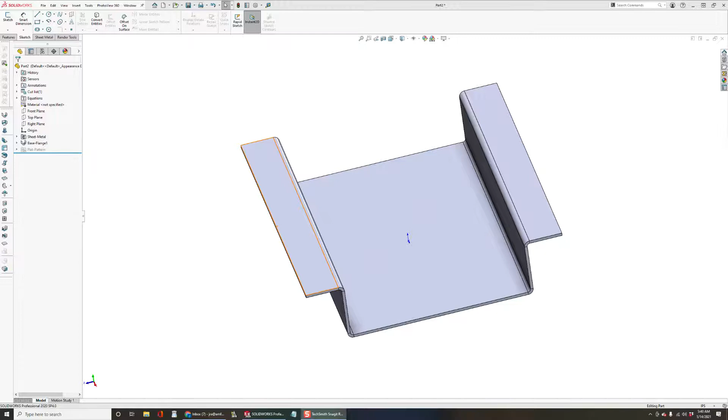So the main use for this feature is if, for example, you have a part here, you have some bends in it, but you want to put a cut that goes through the bend. The easiest way to do that is to unfold the part so it's flat and then extrude those cuts through the bends and then fold it back up. So I'm going to show you how to do that.

It's actually really simple. Over here in the sheet metal toolbar, first of all, this part right here was created using the base flange feature, as you can see over here in my feature manager. So just one feature I used to create that, and now we're going to go in there and I want to add some cuts that go through these bends.

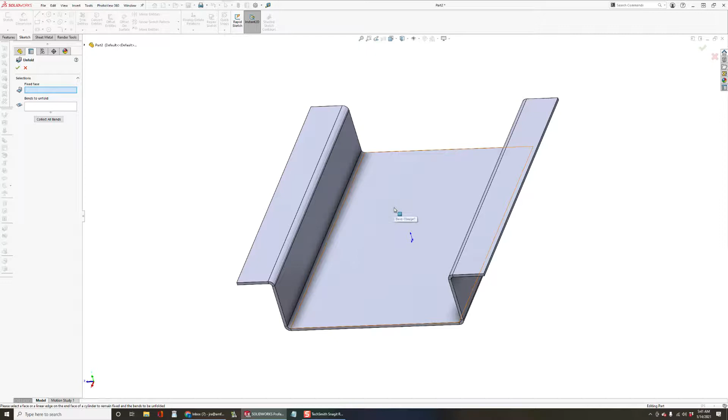So let's go over to our sheet metal toolbar on the left here, and this little icon right there, that's your unfold. So we're going to go ahead and click that. Select a face. So this is basically the face that's going to remain stationary as everything else folds flat.

And then the easiest thing to do is if you want to go ahead and just flatten everything out, you can always do that. If you just want to flatten out a particular bend, then you can do that too. You can start going through and selecting your bends.

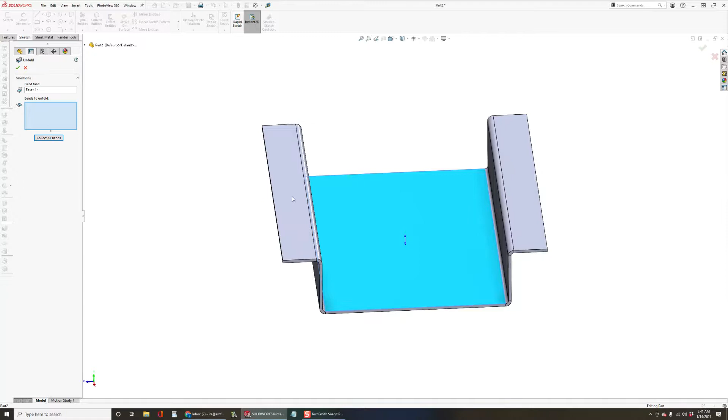So for example, if I deleted all these real quick, if I only wanted to flatten out certain bends, I could just go in there and start clicking on those bends. And then it's just going to flatten out those particular bends. But for this video, we're going to go ahead and do them all. All right, so there we go.

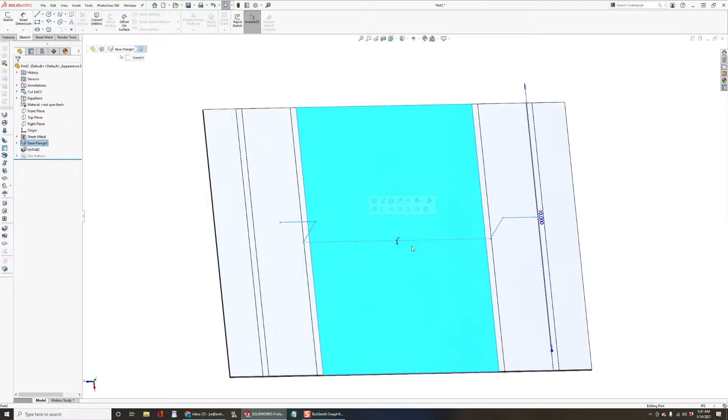Now, I just want to put a cut that goes through these bends, or maybe a few cuts. So I'm going to go ahead and click on a face here, and we're going to open up a sketch. Okay, Control 8 to look directly at our sketch here, and we can just start sketching.

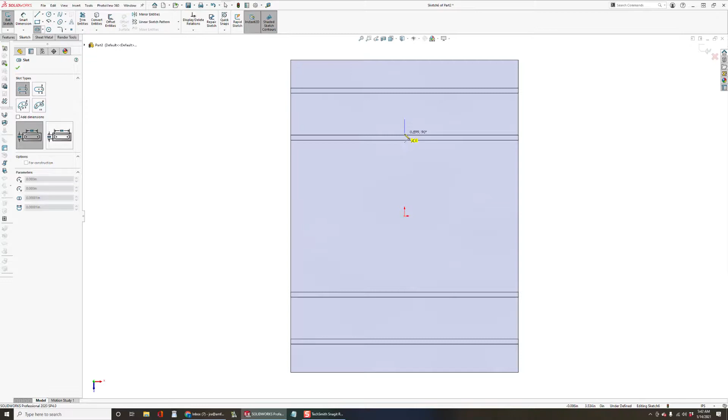So let's say I want to put a slot, going right through this bend right here. Maybe that's a drain hole or something for this pan or whatever it might be. And we can do another one over here.

We can even have cuts that go. Let's do this. Let's create a cut that goes through two bends. Okay, and maybe even we'll do a cut that goes through all the bends.

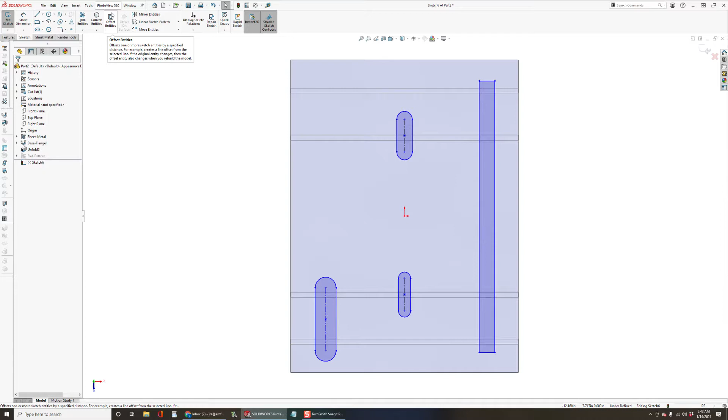And then we'll just do a cut extrude. That's this icon right here. As far as all the details over here, we'll just select link to thickness. So it'll always just remain related to the thickness of the sheet metal part. And we'll say OK. There we go.

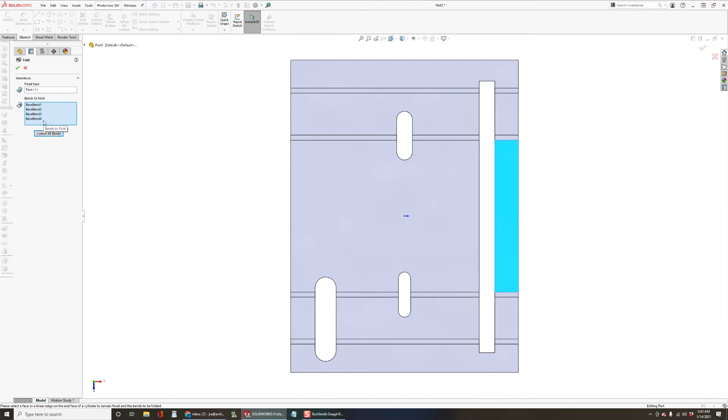There's our cuts. And now we can go back over here to the fold feature. Okay, we can leave that fixed face the same, no reason to change that. And then we can say collect all bends again, and then accept that. And there you go. So there you have it. That's the easiest way to create cuts that go through the bend.